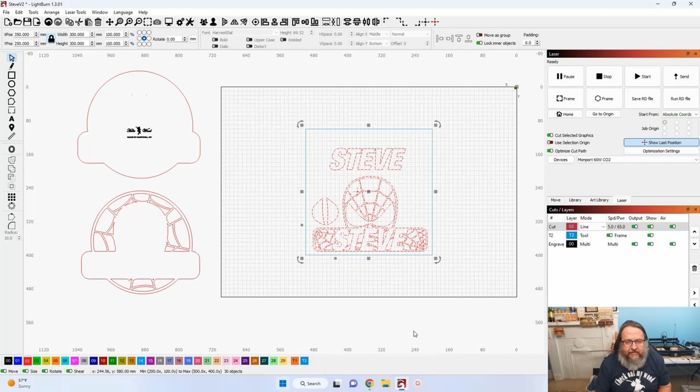So let's jump into Lightburn and take a look at this design and this concept here. All right, so this is what I have on the laser right now. Here's the backboard. That's the backing. This is the next layer, in this case the red layer, painted red. This one is the next layer, which is painted black. And then the name Steve and the mask eyes are painted white.

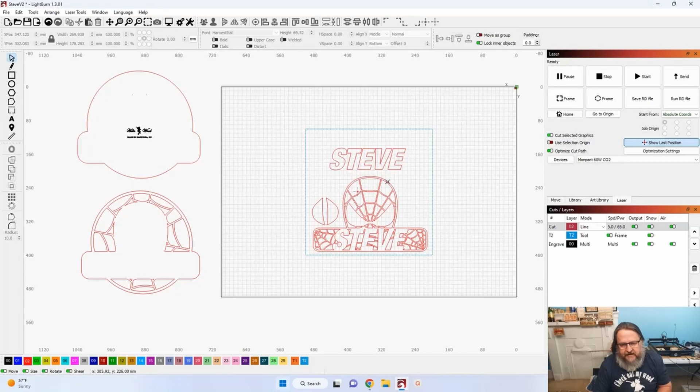Now, to maximize my usage of wood, I've got these all on the same piece of 300 by 300 material, 12 by 12 inch material. Then I'll place this here. So I have 3 different cut jobs sent to the laser to create this. But first, let's show you how easy it is to draw Spider-Man.

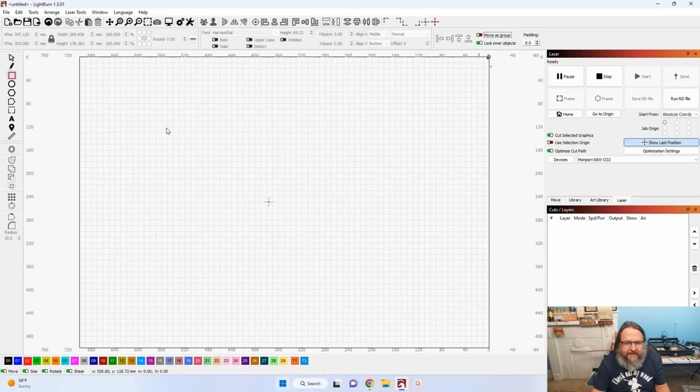Now, if you're going to create a sign and you're working with a given fixed piece of material, that's the first place I start. I put me a template out here for how big my material is going to be. Put that on a tool layer. This is 300 by 300. And that's the area that I need to design within. Now, why is it important that I start with this?

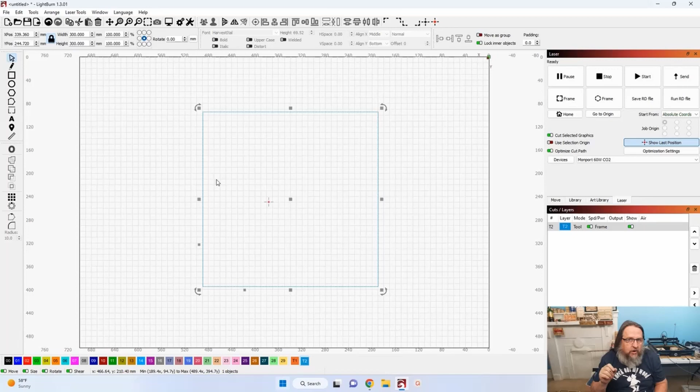Because I find when you're designing things, especially Spider-Man and Spider-Man's web, if you design it too large and it looks good with the web features the way you want them, and then you scale them down, now you may have made them so minute that it's almost impossible for your laser to cut out and it not be too fragile. So I start with my known work area here, and Spider-Man, he's an egghead.

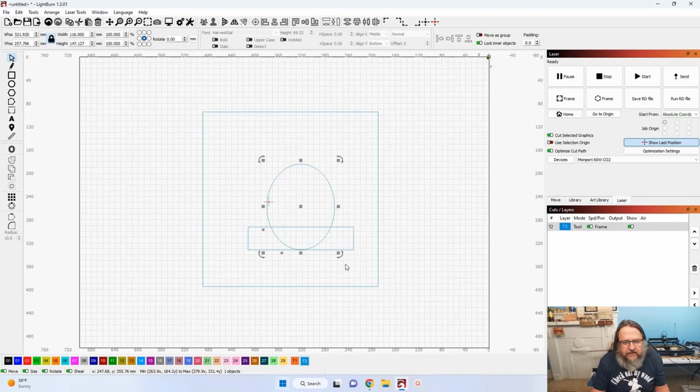And I'm going to have a nameplate on here. Center those up. Get that to what kind of proportions I think I want it to be. I want it as big as I can, but this is 4 layers, two of which will be offsets of the original, each getting consistently larger.

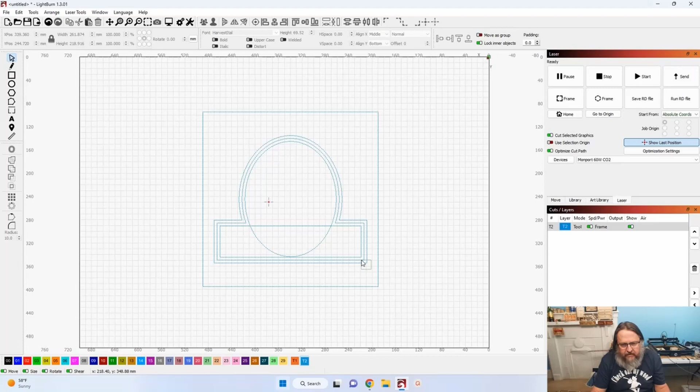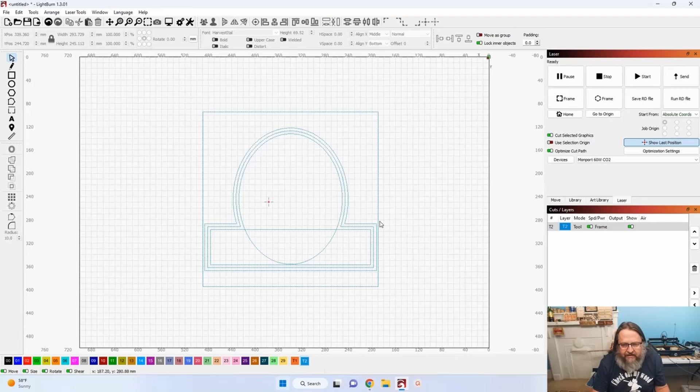So if I start here and I give myself an offset of 5 millimeters, there's one, and then another one offset. Alright, so that would all fit easily. In fact, I could even make it larger. That's about as big as you're going to get out of a 300 by 300 piece of material. In fact, I'm going to take it down just a little bit, but I know that will work, so I'm going to delete that. I'm going to take this down just a wee bit.

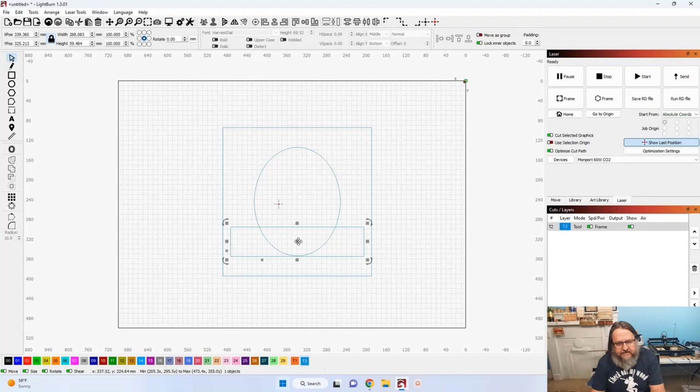And let's get the name out of the way. Now let's make Mr. Egghead here Spider-Man. Alright, first let's convert our oval into a path. Show the nodes. Let's grab this bottom node and I'm going to bring her down. As long as I don't go wider, I'm okay. Now I'm going to grab these two nodes and take them up. Now I'm going to make him a little skinnier. He's a little fat-headed.

That's starting to look pretty good. In fact, I like that. Alright, now let's get us over here to our polygon tool. And I'm going to draw out a little polygon. I'm going to put it in the center of the oval.

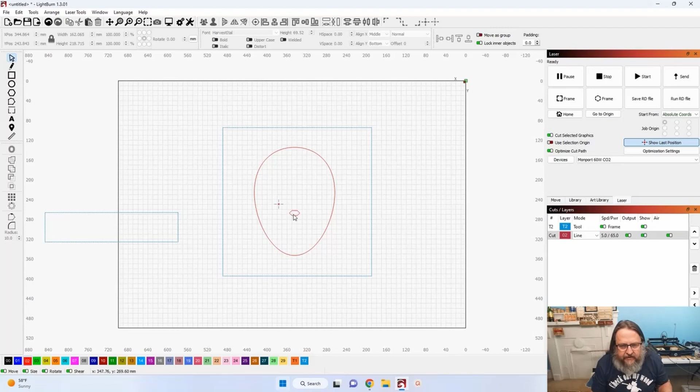And when you're looking at Mr. Egghead Spidey, let's put this on the red layer, it's easier to see. That little polygon is, for me, in reference to where his nostrils would be. So that actually looks about right.

Now I'm going to come up here, let's zoom in a little tighter. Grab our pencil, and I'm going to come to that point on the polygon. Start a line and bring her up till I get an intersection there. We'll come here to this point. Get an intersection. Same point again. And now, in fact, let's do that one again.

Okay, I think I like that. You know what? No, I'm going to get rid of that one. Come here. Start my pencil. Alright, now, while I'm in pencil mode, let's give us some lines here. In fact, I'm just going to come around here.

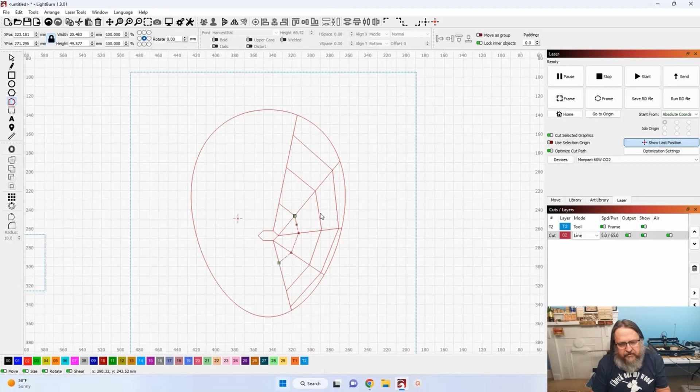Got a job done on the laser. Yay! Alright, now I'm going to go up here to my node editing tool. And I'm going to select right here, and I'm going to hit the letter M. Come down here. M. M. Putting the middle node on all of these lines.

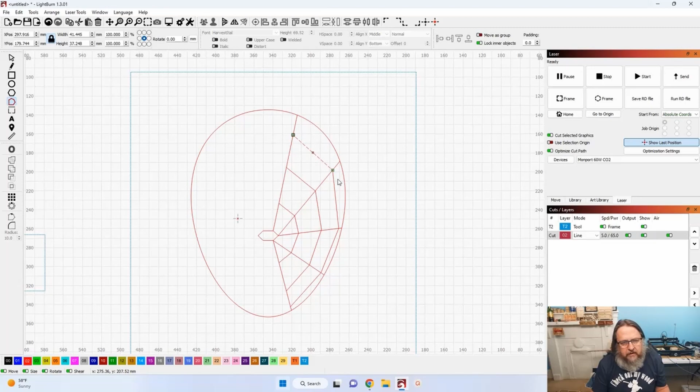Alright, now I'm going to select all of this, go into node editing, grab each of these middle nodes in this column, and I'm just going to grab this bottom one and bring it down about like that. Then I'll come over here and grab this. Actually, I need to, there we go. Now grab that, and that.

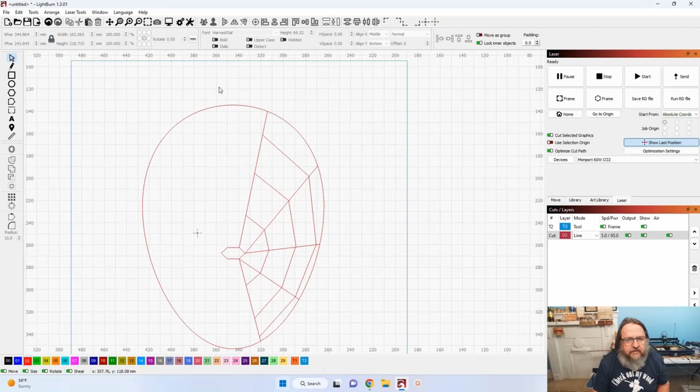You know what? I did not turn those into smooth lines, so let's start that over. I select all that, go into node editing. Now, over each one of these, I'm going to hit the letter S first. And now I'll select those that I've now turned into a curve. And now, there we go, that's looking better. And S.

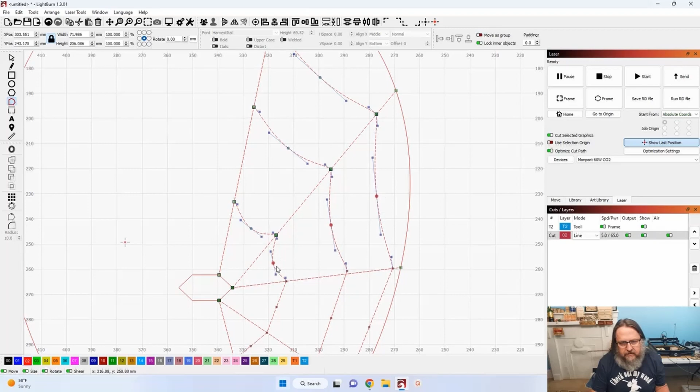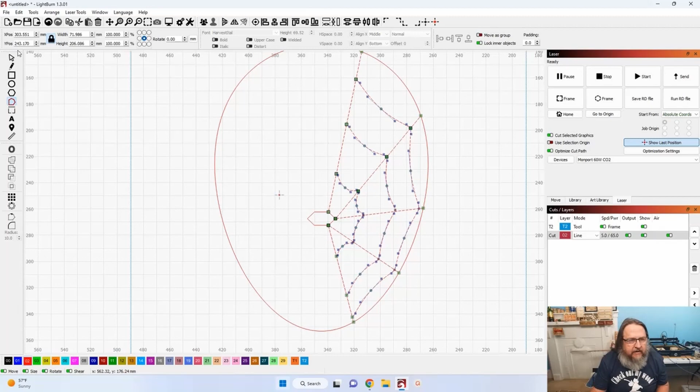I forgot to unselect those other ones, so let's undo that move. And now just select these. S, S, S, and select these. Alright, now let's look at that without the nodes. Are you starting to see Spidey? Now we got to create all the others. No, we don't.

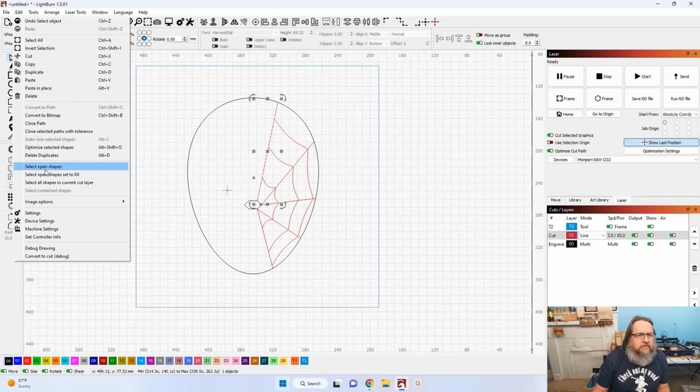What I'm going to do is I'm going to select my polygon and my egghead. I'm going to put it on a black layer. Put it in line mode so I can see everything. Now, if I select any one line on the red layer, then tell it to select all shapes on current layer. Select open shapes. Select all shapes in current layer. There we go. I'm blind for a second. Now that gives me all of those.

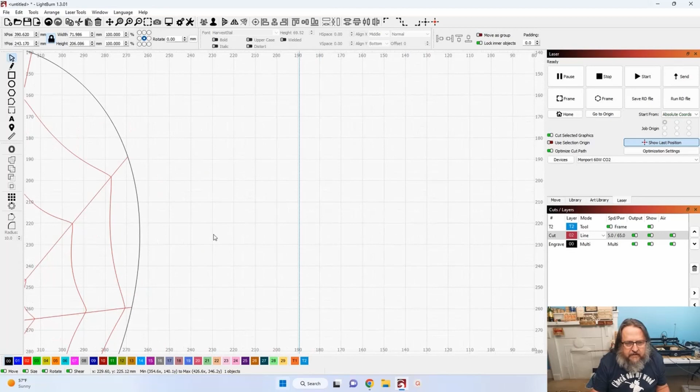Now I'm going to, in fact, I'm going to group those. I'm going to hit a Control D, duplicate it, mirror it, bring that over, and all I gotta do is come right here and grab that point and put it right there on that polygon, and there's the other half of his face. I just need to create those middle lines.

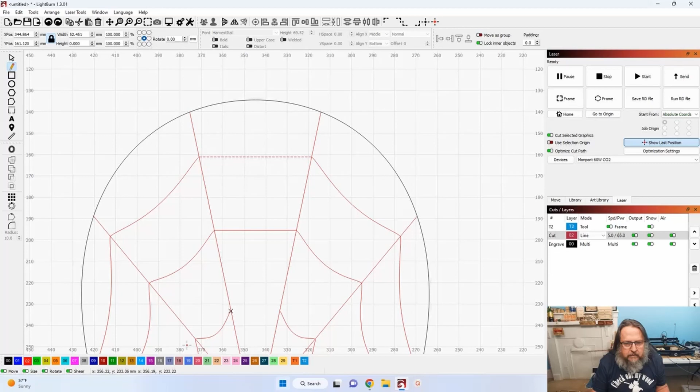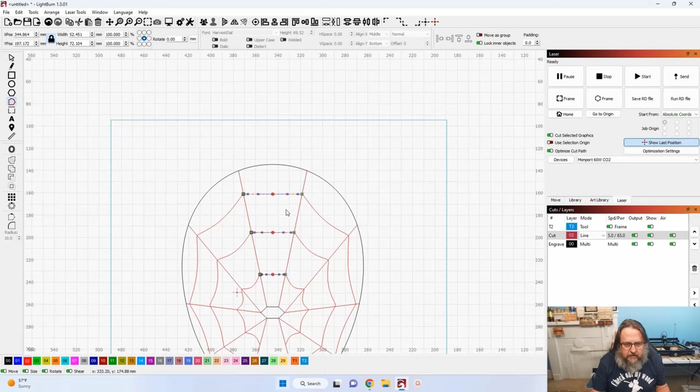Go into pencil tool. It's on the wrong color, wrong layer, but it's okay. Done. Now I'm going to go into my node editing. M and S. Come down here, M and S, and here, M and S. Now I'm going to select that node, select that node, select that node, and now just bring it down to give it a similar curve. Same thing down here.

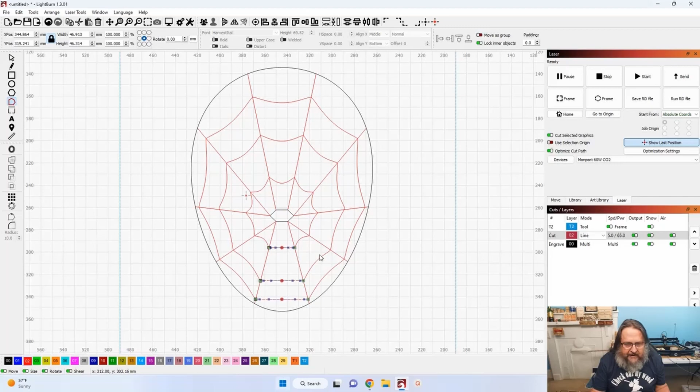Node editing, come here, middle, smooth, MS, middle, smooth, MS. Select that one, and select that one, and bring those up. Okay. Now you're starting to see a little Spidey, a little something looking familiar. All right, let's put the polygon back on the red tool. In fact, we'll go ahead and put the outline back on the red tool.

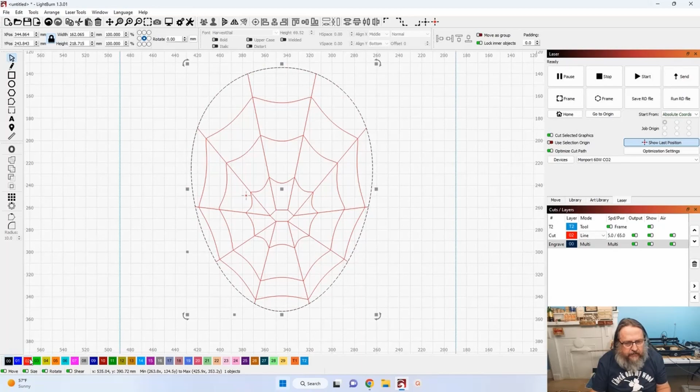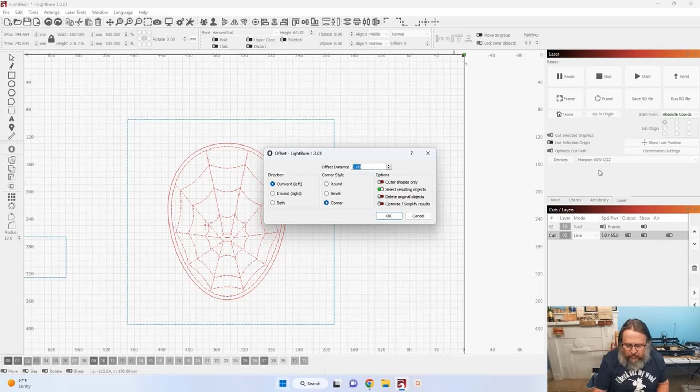Now I'm going to select everything. These are lines; obviously, you saw me draw the lines. I'm going to the offset tool, and I'm going to turn off outer shapes only. And let's do corners, and we're going to do 1 millimeter. That didn't work for me. All right, cancel that. There. What's going on? Why did? All right. So there.

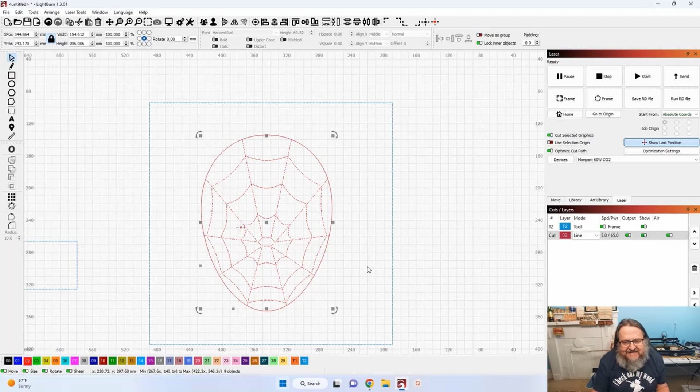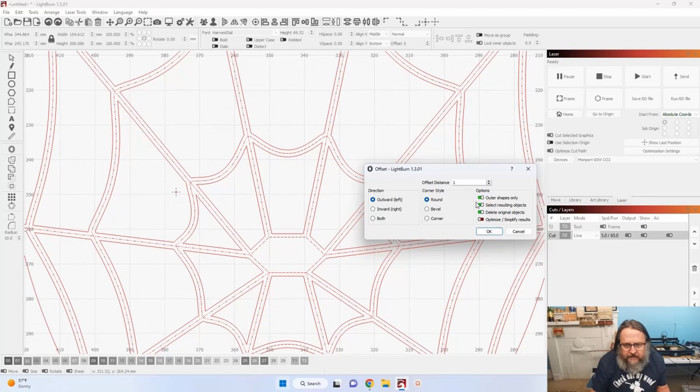In fact, what I want is everything minus the outer face. So select it all. Now hold Control and left click, and that deselects that. Now I want to do an offset, and I want 1 millimeter offset. I want to do round, and let's take a look. Delete original objects. And okay. Alright.

Now I'll do an offset of the outline, but I want this to be 2 millimeters so it matches. I did a 1 millimeter offset on the lines because I did a 1 millimeter offset in each direction, which made it 2 millimeters wide. So now if I do an outward 2 millimeter of just that egg, now it matches. I do not want to delete the original, say okay.

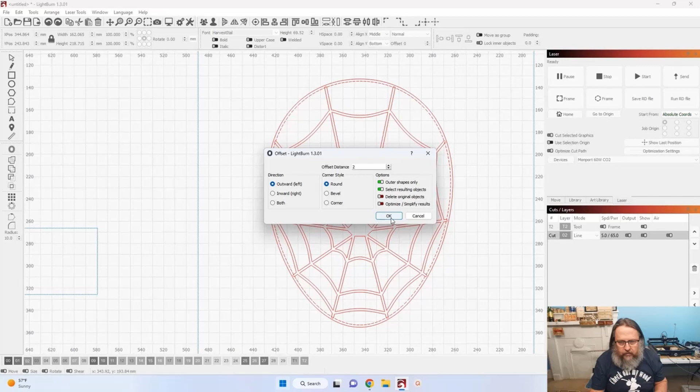Now I want to select just this and select that. Go to my Boolean tools, the Boolean assistant, and look to see which one is going to give me. I don't want that. That's what I want. So okay. So now you start to see Spidey. He needs eyeballs.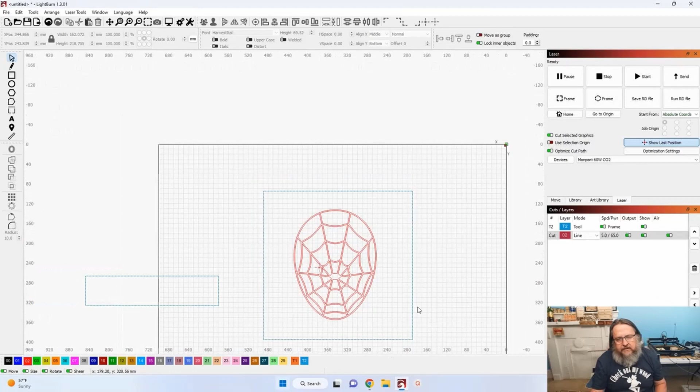But if we look online, let's see. Now, very, very similar. But instead of right-clicking and copying and pasting, I just drew my own Spidey. So that's the technique I use to create my Spidey. Come here, add him to the graphic. And see, my Spidey's a little skinnier, which at this point is not an issue.

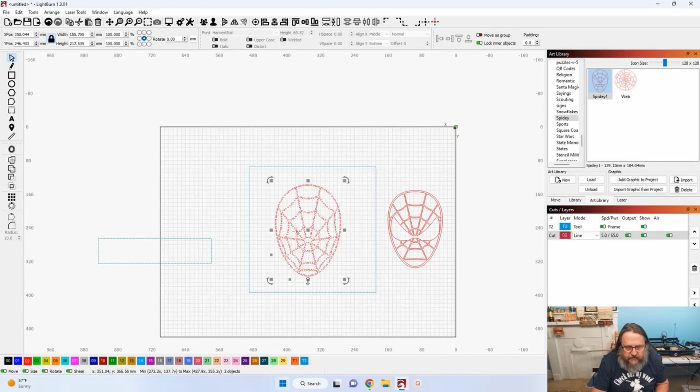Just grab that whole thing. If he's a little fat-headed, we'll shrink him down. If he's a little tall-headed, we'll shrink him down. We don't want to go any wider than original because we don't want to get too big when it comes to offset issues or size issues. But anyway, so you do that. Then I created the eyeballs, used my cut path, created those, got them out, and that's how you get your Spidey-Man face.

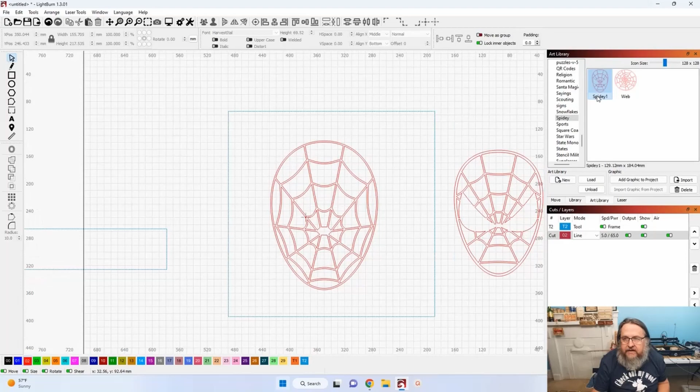Once I've done that, you see that's also how I create the webs. Now this particular web, add to graphic, was created in a similar fashion, but this one is not as uniform, and it's actually more organic. It looks more realistic because it is not symmetrical. Spiders are pretty good about symmetry, but they're not always perfect.

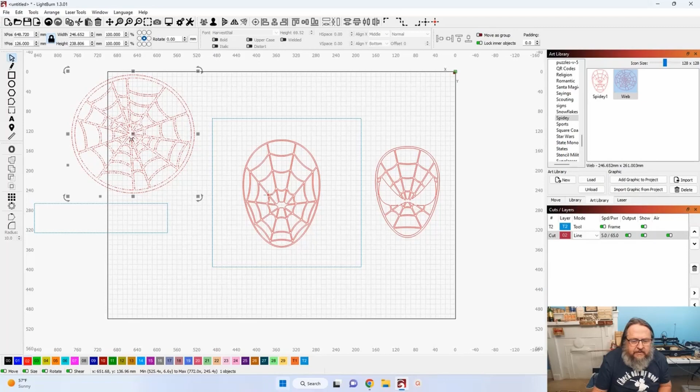So this is from his artwork, and I will be using that in my design, so I'm not having to create all of it. You've seen I could, but when I can take a shortcut, I will, as long as I'm not infringing on someone else's copyrighted material.

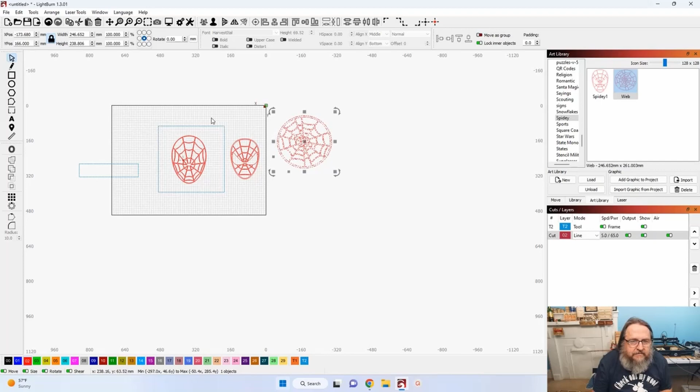Alright, now, let's delete all that. Yep, delete all that. We don't want none of that.

Okay, so I had to shut the fans off on the lasers. Now it's a lot quieter in here. We can hear each other think.

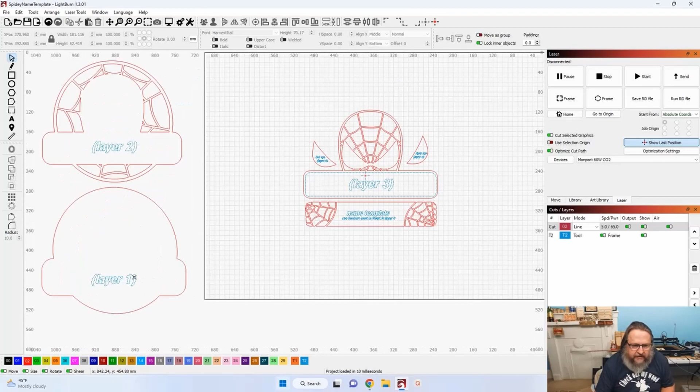It is pretty self-explanatory, but maybe you've never done a file like this or built a layered project, having to bring in your own names and weld them into position. Let me show you how that's done real quick. I have toolpaths labeling each layer. This is layer 1, the very first layer, the backboard. Layer 2 sits on top of that. I paint layer 1 blue, then I paint layer 2 red.

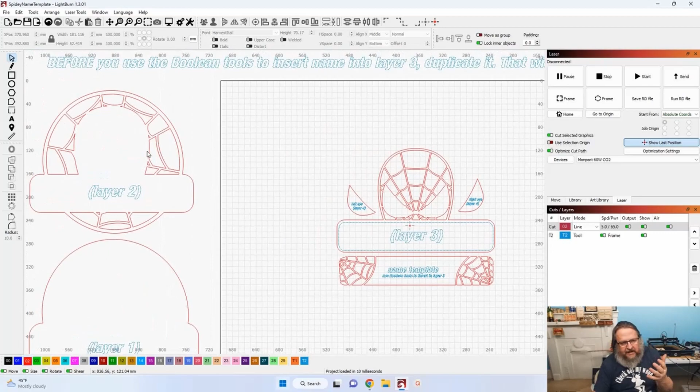Layer 3 I paint black, and that is the outlines of the web that show on top of the red, giving you that Spider-Man mask illusion. But we got to put the name in there. And there's also these little eye cutouts right here. This is the left eye. It fits over, has a small offset, looks good that way.

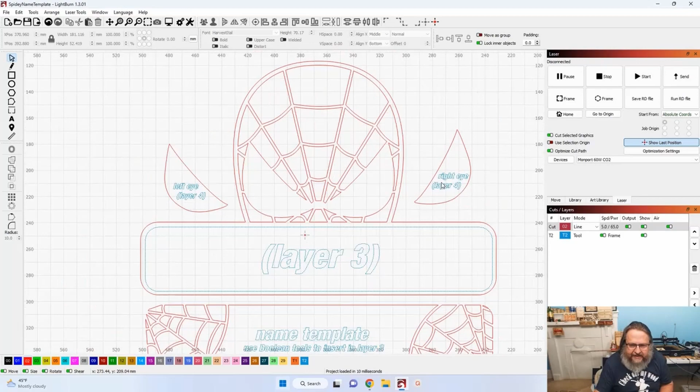Layer 4 I paint white. Do the eyes white, and I do the name white. You can actually do the name in a different color. The eyes look good white because that's the way he is depicted in most illustrations. But there's a very crucial thing here. Before you use the Boolean tools to insert the name into layer 3, duplicate it. That will be your layer 4.

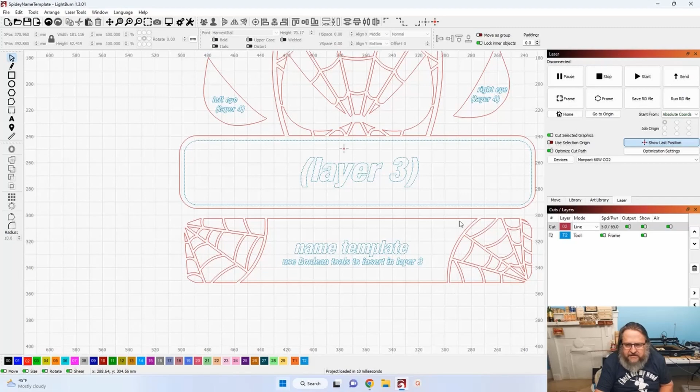Okay? So this is your name template, and you're going to use the Boolean tools to insert into layer 3. So you're going to put your name in here. If you're not familiar with your Boolean tools, use your Boolean assistant to put your name in, and then move that into position by simply aligning this whole thing with that toolpath. And I'll show you how we do that.

I'm going to create a name. You use the font and style of your choice. I use all caps. Makes it easier when it comes time to weld those into position.

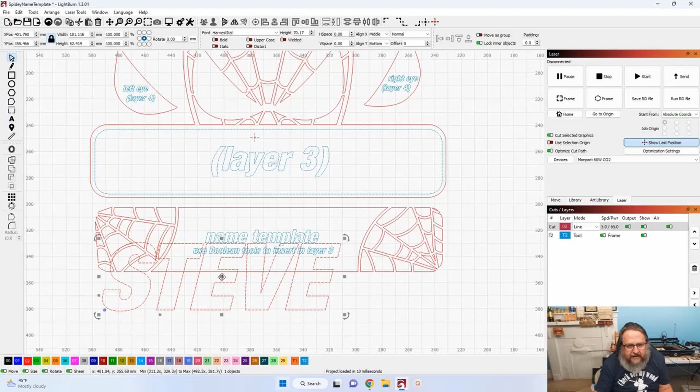Take that, let's see, is all this grouped? Should be. Yep, all that's grouped. So you can take your font, your letters, select that and just tell it to go to center. And what you're going to look for is to make sure you have your font overlapping the top line in this template and the bottom line.

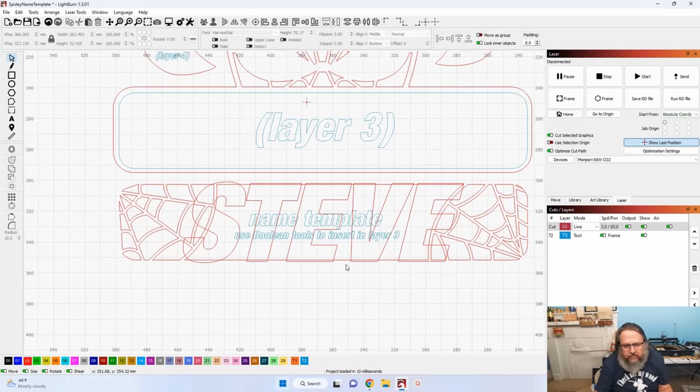They must overlap. Now select that, come up here to your Boolean tools, Boolean assistant, and as you hover over each one of these options, it'll show you a preview. Nothing is done until you select OK.

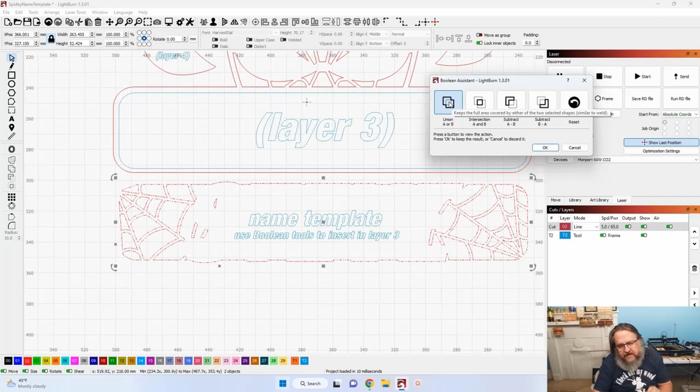So you don't want union. Intersection, you don't want that because we're missing our spider webs now. That looks pretty good, yes, and that's what we want, but I'm going to show you the last option. There, so that's not what you want. So select the one that works and say OK.

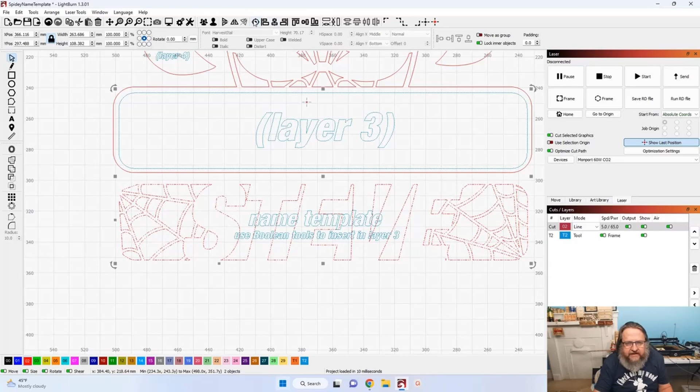Now with that selected, just hold your shift key, select that toolpath, and tell it to center. Now you have... but you know what I failed to do? Exactly what I told you to do a minute ago. And this is why. You do this before you do your Boolean.

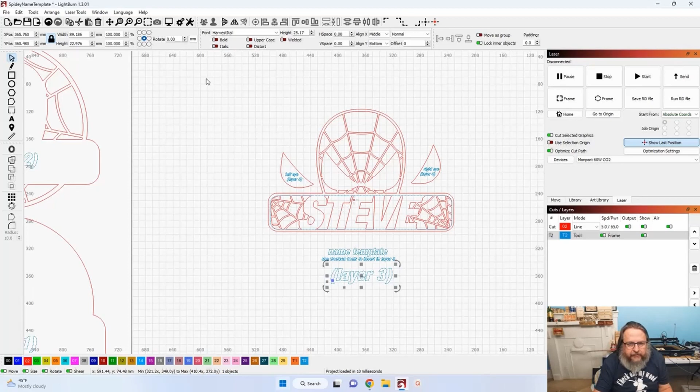Now I don't have that font, or that exact cutout of the word Steve, in order to put on layer 4. So even though I created this thing, and I forget it every darn time, but it's easy. You just undo, select that font, select that text, hit Control D. Now move it down out of the way. There you go, stupid. Now select everything, go back into Boolean Tools, Assistant, and that's the one we want.

And what you're looking for is this up here needs to be open. You need those open, and I'll show you why. Say OK. Now select that toolpath and put it in the center of that toolpath, because now if we turn that toolpath off, now what you see...

This is all going to be still attached. That'll be a cutout. Your webs will be there. The letters will be there. But nothing's going to fall out when you pick it up off of your work table. I spray paint that entire layer black. I spray paint my duplicate white and then glue it right onto the top surface to give me my fourth layer that goes with the eyes.

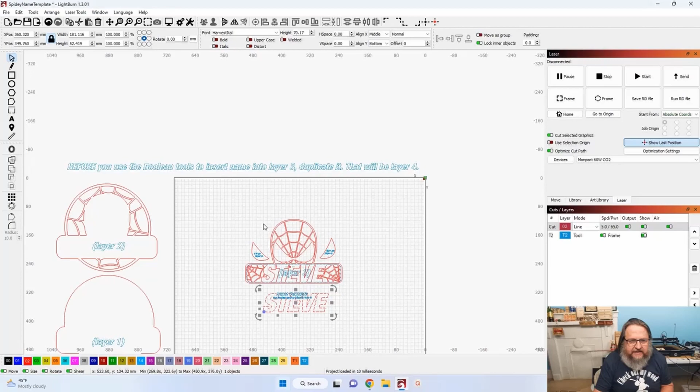Like I said, if you did it in a different color, that's totally up to you. But FYI, if you're trying to get that Spidey theme, his colors are red, white, blue, and black. So there you have that. Hopefully I didn't confuse you too much. Like I said, turn that back on so you can see. Right there is the biggest thing.

Before - and I forget it every time - before you use the Boolean tools to insert your name into that layer 3, duplicate it. You need that duplication. So this file will be just as I showed you on hobowithwood.com, and create you some fun. I have been selling the hound out of these.